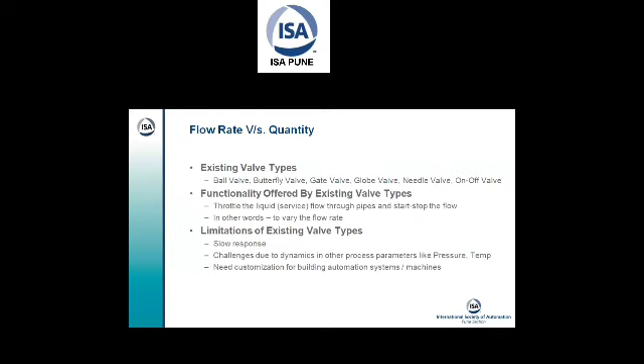Because these valves are actually not meant for liquid dispensing applications. When liquid dispensing depends on flow rates, we need at least 2 to 3 different flow rates, then there's limited bandwidth due to customization. We have compensation arrangements for dynamics, making the automation complex, which leads to higher capex, opex, and space. Ultimately, due to less accuracy, huge cumulative losses occur.

As these limitations are known, and still some of them are in use, there is an alternative to valves, particularly the positive displacement pumps, the PDPs. These PDPs, if you need fine control, require VFDs as well, which have limited bandwidth, and again huge cumulative losses occur. Thirdly, flow meters or flow totalizers are used to take feedback of the quantity passed through, and the control or cutoff is made accordingly.

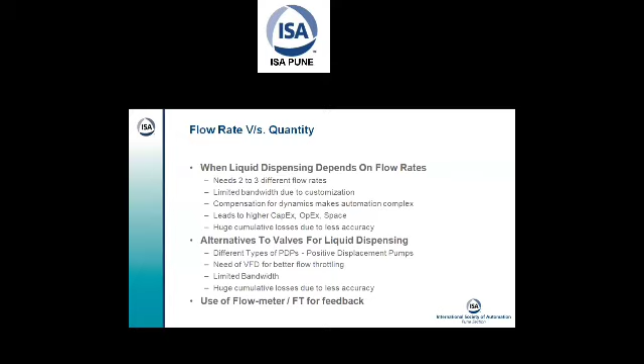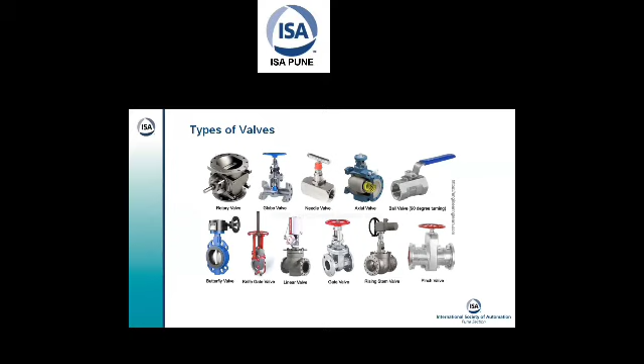So here are a few valve types. Not all of them are used for liquid flow, but as I had this image, I chose it. Certainly the rotary valve we do not use for liquids, but other valves, irrespective of their actuation, whether manual or automatic, these are the basic types in pictorial form, we have put over here. Next is the positive displacement pump - not all the types, but some major pumps for positive displacement are displayed here. They have their own advantages and disadvantages, but the things are not so simple.

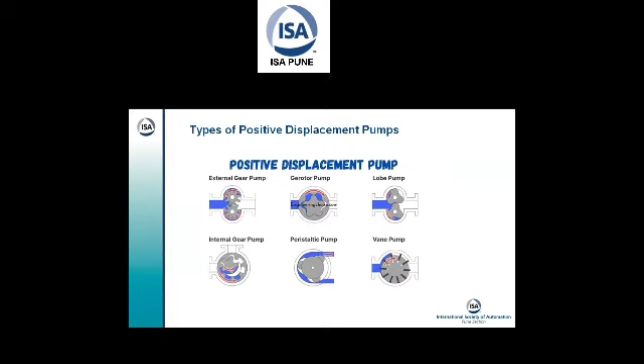So here the product comes as a pair of product. Here I am marking the digital controller, and I am pointing it out to the valve itself. So it comes as a pair of product. This particular digital controller has been developed with a specialized algorithm which makes this valve unique as far as both the things go together. Hence, this digital controller allows you to build a calibration profile at a given site, and you can dispense any liquid. This dispensing is based on least count.

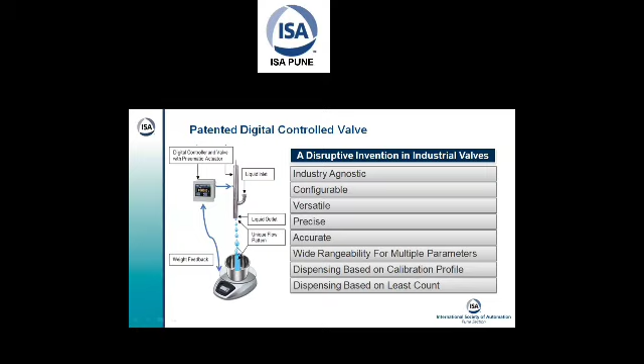Then the liquid outlet is here. Liquid flow pattern is shown here. The weight feedback goes to the digital controller, and then it modulates the air pressure to really dispense the liquids over here. Now what is the next thing?

It is actually a sustainable paradigm shift. It is not for the sake of invention - it's not just an invention, the things are going to stay and make a sustainable impact on the industries. Secondly, as it is industry agnostic and the change is across the globe, it is going to have a global industry impact.

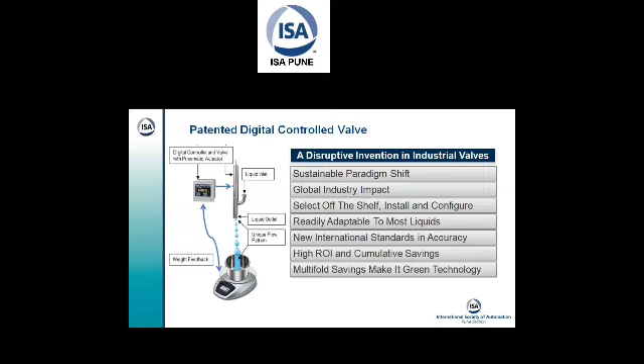Then you have a simple application to take forward: select the valve off the shelf, install and configure. So out of very few valve sizing variations, you are able to pick one valve, install and configure, and you are sorted. It's readily adaptable to most of the liquids. And then it sets new international standards in accuracy and precision, high return on investment and cumulative savings, and multifold savings make it a green technology as well.

So what is the USP? We must know, being a tech talk here, the unique working principle of it. The newly invented liquid dispensing valve, in combination with the digital controller, generates a dynamic aperture according to modulated pneumatic pressure.

As the pressure is modulated, the aperture of the valve opening is also dynamically changed, and the changes are so quick and for such short times that it dispenses a very unique flow pattern out of it. So there is no typical flow throttling as we see in analog flow throttling, but this is all digital slicing we do, and that is why we call it a digital controlled valve.

In the unique functionality, you will see that this generates a unique dispensing profile of discrete packets that are finely or closely deviated. The smallest packet quantity can be a drop weighing a fraction of a gram, while when it is 100% open, it delivers the maximum flow rate up to several hundred grams per second, and it depends on the valve size as well. This may vary with change in size and other parameters involved in a particular application.

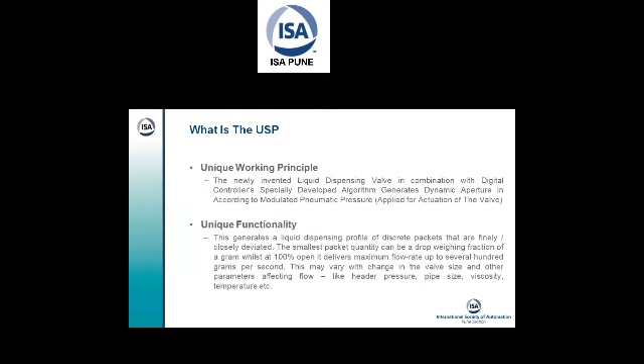When we have explained so much, we must see the product on camera. How does the product look and what are the product connectivities?

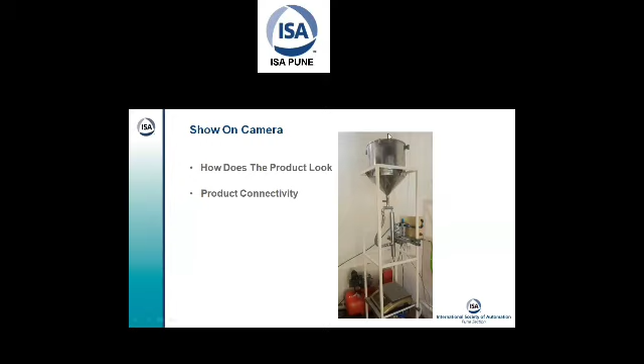So I am here on the camera. You can see I have the product right here. As you have some idea about the product, now I'm holding it horizontally so that it is covered in the camera.

So this pipe-like structure is the valve. I'll show it part by part. The upper part is the actuator. Here you can see the pneumatic input fitting, air modulation. Then this one is the liquid inlet, and from the bottom, it is the outlet, which is tightly shut off right now. So this is the valve as such, as a complete product.

And here is another very small version of it. You can see the difference between the two products in sizing. This is under development, almost done, but we are working on it. So such a small product is also available, and other sizes are also equally available.

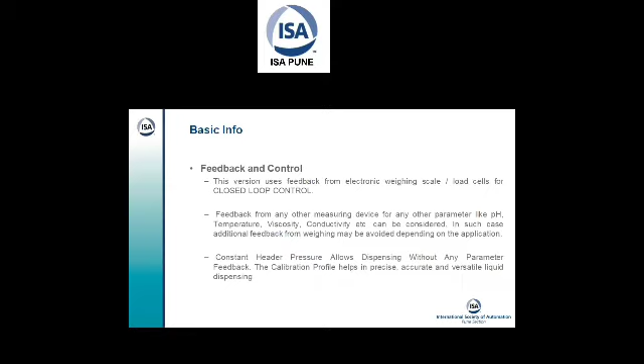If you maintain constant header pressure, it allows dispensing without any parameter feedback. The calibration profile helps in precise and accurate liquid dispensing. The usability is that the newly patented digital control valve precisely dispenses liquid by gravity flow while eliminating dependence on factors like viscosity, liquid media, header pressure, etc., because all these things are auto-tuned due to its unique functionality of several discrete digital packets.

One can pick it off the shelf and configure at the site. Once calibrated, you can ask for any odd quantity and dispense it simply by typing it in, without needing different calibrations again and again for a given site condition. You can switch to any other liquid very swiftly - just clean the same valve, sterilize it, and select the respective profile from the digital controller, and use it for any other liquid dispensing requirement.

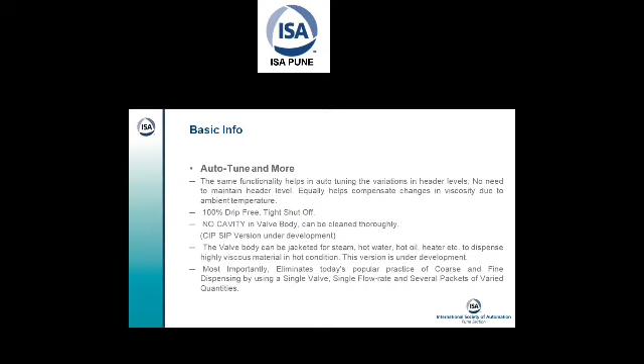Least count is the new advantage here, that the valve is able to dispense at par with the least count. As I was talking about the percentage error concept, which is globally popular today, that is thrashed out - whether you dispense 500 grams, 1 kilo, 5 kg or 10 kg, you can literally chase the target to a fraction of a gram, and huge cumulative losses are saved because of it. This is the auto-tuning I was talking about, already covered.

The commercial benefits are: one single valve can flexibly be used for a variety of target quantities, variety of liquids and different conditions. As you have different profiles already in the digital controller, you can invariably use it with highest versatility. There are applications like a wide range of formulation batch sizes that can be covered using the same setup.

Then you can do CIP, SIP, and with that I'll show you how a very compact setup can be put up. This saves capex, opex and space by at least 50% or more, and increases throughput by at least 200%. It's worth retrofitting.

You don't have to worry about having to scrap the entire setup to incorporate these valves - only the core part, wherever relevant, would be removed, and this can take its place and be retrofitted to give you the highest advantages.

The material of construction is SS316 and Teflon and other suitable elastomers. This gives a long life, and most liquids are easily adaptable and compatible with it, right from food, pharma to hazardous chemicals.

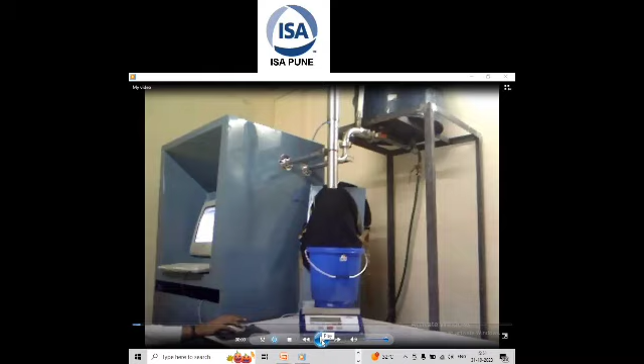So this is the valve I'm talking about. This is the liquid inlet, then this is the liquid outlet, and this is the pneumatic actuation over here. This gap is deliberately kept so you can see the liquid dispensing pattern. So 2.5 kilogram, how fast it is done, you can see.

And this was very close to the target, and these packets are coming out. So the packet size is getting reduced, and at the end it would be just a drop, like an ink dropper, right? You must have seen it. Okay.

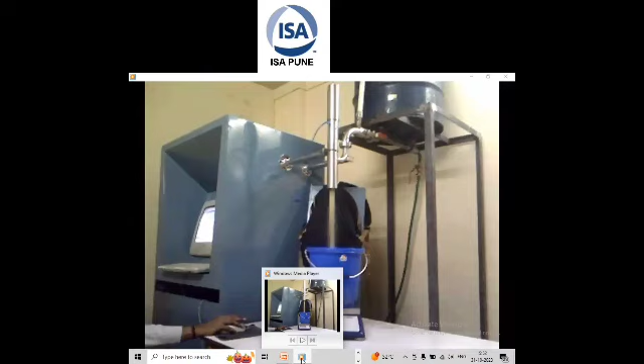Why is the drop coming? Why deliberately is it put? Yeah, it is deliberate. It is not dripping due to unwanted closure. It is able to control even the drop along with such a big flow. That is the uniqueness of it.

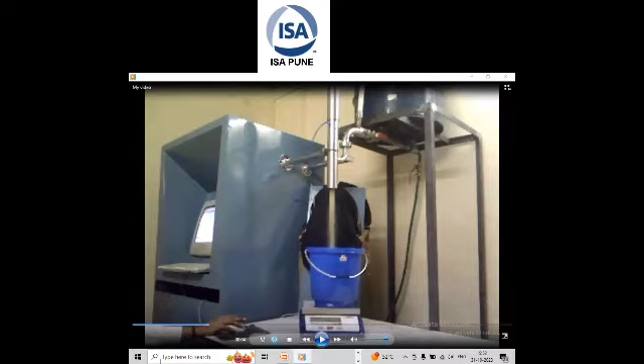And how accurate that is, you can see in another video.

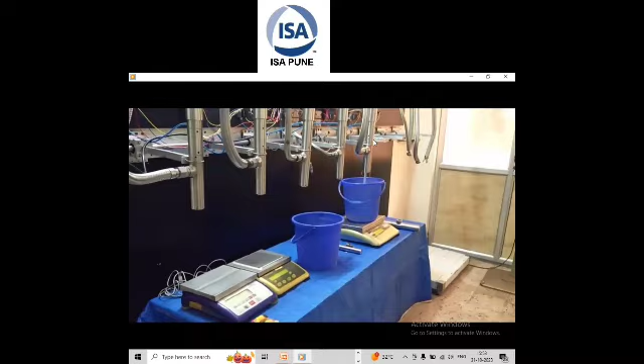Are you able to hear the audio of this video? No, okay. So here the weighing balance is also automatically zeroed and tared after the bucket is placed. And it is asking to dispense. Container weight is tared and it is starting now. So you can see number of valves here. That also will show how this arrangement can help us in different applications.

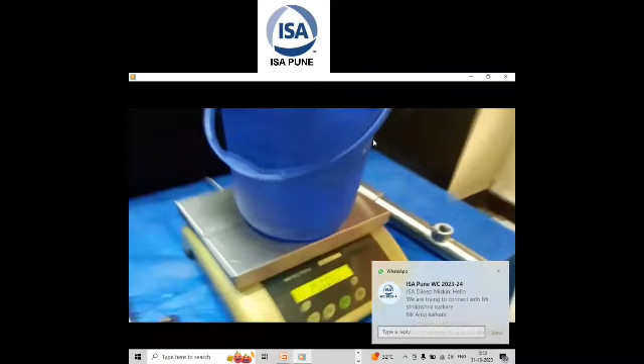And these packets are coming up. And you can see, 2500.7 - so actually when the weight was stable, it was 0.3 gram excess. Now we'll see another video.

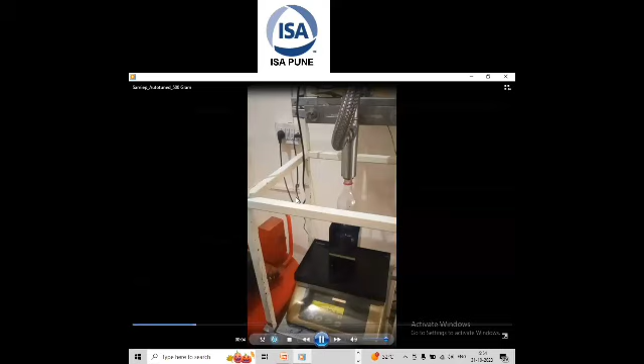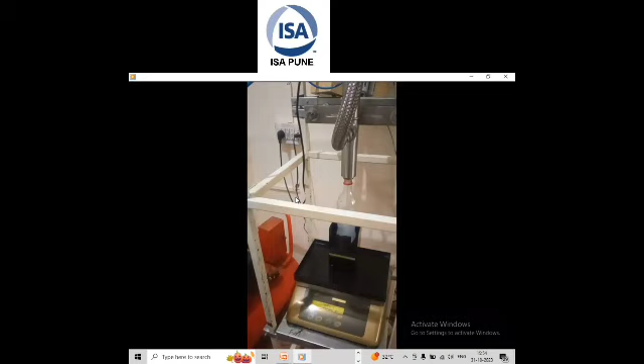See, there are - 500 gram target. So it is taking feedback of weight also while it is getting filled. And you can see the weighing scale display. I think 500.3, it is settled. Yeah.

Okay, so I think you must have got a fair idea about it. We'll stop the video showing over here and we'll go back to the presentation.

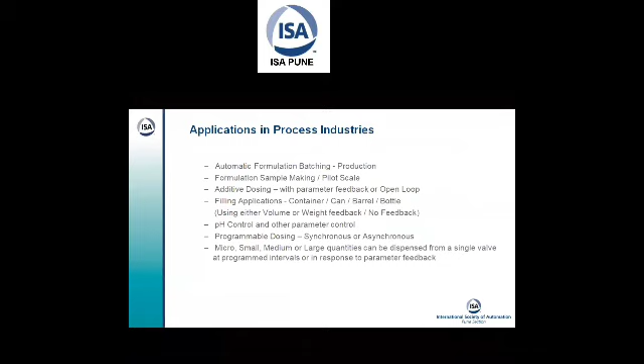Applications in process industries are right from automatic formulation batching for production or even sample making or pilot scale. Then additive dosing we can do either with parameter feedback or open loop as well because of the calibration profile. Then typical filling applications like bottling, container, can, barrels, whatsoever, either with weight feedback or volume or no feedback. pH control, programmable dosing, synchronous or asynchronous, and then micro, small, medium and large quantities can be dispensed from

one single valve at programmed intervals or in response to parameter feedback. So what we can say is that suppose there is an exothermic reaction and you want to dose with the feedback of temperature, and you know that with rise of certain temperature how much you are supposed to dose, then those kind of patterns also can be defined and controlled.

So here is a compact arrangement example of automatic formulation batching. This arrangement we saw in an earlier video, whereby the number of valves are mounted on slide rail. And what can happen is the valve can be slid over to a particular filling station where the batch is carried out. You can manually lock it. You can connect the container and dispense any odd quantity based on its profile. And once the dispensing is done, you can pass the valve for cleaning and bring in the next valve by sliding in. So with this kind of arrangement, hardly even 10 odd number of valves would be sufficient for you to take care of hundreds of raw materials in automatic formulation batching.

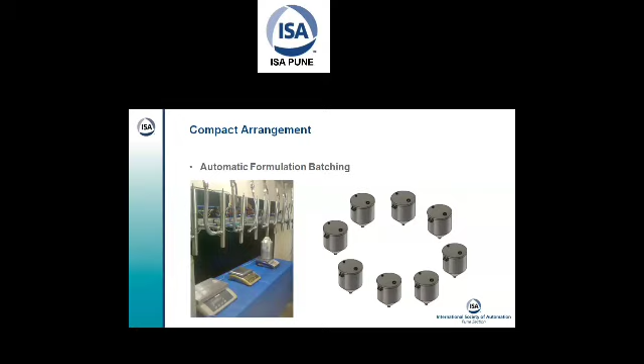At the same time, you can see on this particular vessel, there is an inlet here for refilling. These tanks are completely tight to be compatible to sustain certain pressure. And then you have another inlet on top of it here, which can be used either to expose the liquid to atmosphere, or you can put nitrogen pressure, or you can connect it to a vacuum if after use you want to clean and evacuate all traces or odor inside, then you can use it that way also.

And what we see is generally that there are three P's in manufacturing: production, packaging, and penetrate. So production and packaging we already have discussed, but what is there for penetrate? What happens is the market is always scattered.

When the market is scattered and you produce at one place in large quantity, you face challenges of having lots of resources at one place, needing very fast machineries, and you end up with huge cumulative losses. Then you need a dealer distribution arrangement where you lose at least 40% of your margins.

So in the Penetrate section, we have come up with a concept called DAD, decentralized automated distribution. There would be a DAD unit taking care of the hyperlocal market, supporting you on a call basis. You don't need large agreements for bottling or blending jobs; you can do it on call basis for a day or two, like a just-in-time, just-required-quantity concept for the hyperlocal market.

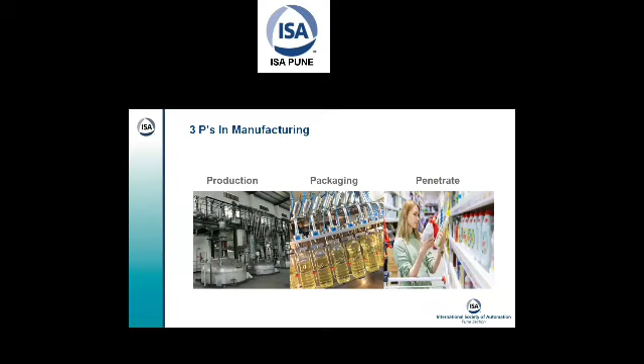We see nowadays that plastic saving is in very high demand. In Europe and other places, people carry their bottles to fill liquid soap or other liquid products as per the quantity they want. Those kinds of authorized outlets can also be there with different business arrangements.

I'm coming to an end. If you consider the sector of impact, almost every industry vertical, right from cosmetic, flavor fragrance to pharma, API, Ayurvedic products, chemical, dairy, food, even defense - we were invited by ISRO to carry out a live demonstration of rocket fuel, which worked out beyond their expectations, and they gave us a letter of satisfactory demo. You can expect this product in oil and petroleum, water, wastewater, biotech, polymers, leather, paint, ink, adhesive, specialty chemicals - everywhere you can really make use of it.

To summarize, what we have reduced: number of valves and piping, cumulative losses, capex, opex, space, automation complexity level, design efforts - because it's configurable, you can pick off the shelf and configure. It has reduced carbon footprint and reduced dependency on liquid media, that is change of viscosity due to ambient temperature or header level and any quantity requirements. What it has increased is rangeability, versatility, accuracy, precision, consistency, product quality, ready adaptability, affordability, throughput, ROI, and process uptime.